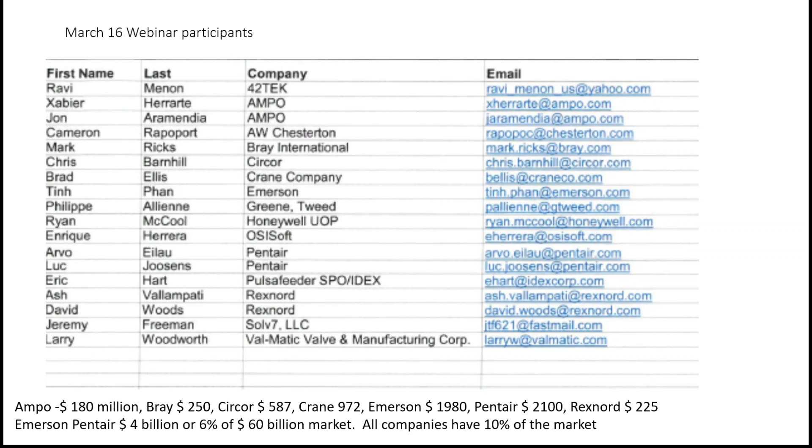So let's start with the markets. We believe IIoT will radically change the valve routes to market and the revenues, with a growth rate of about 13%. It will be responsible, and we'll get into the definition in a minute, for valve revenues of about 50 billion by 2030. So if you're an active player in IIoT, you're going to have potential for $50 billion more in revenue, and some slice of that pie, than if you weren't involved in it as a valve supplier.

Certainly general purpose valves are the foot soldiers of IIoT, but the high performance valves belong in the armored division, because their performance is much more critical to the outcome of the battle to improve plant performance.

IIoT promises to revolutionize the industry, but only if it is accompanied by IIoW, the Industrial Internet of Wisdom. And we believe essentially you're at square one on the Industrial Internet of Wisdom.

Let me give you an example. With all these things we're doing in IIoT, you're going to have smart sensors that feed an edge computer that makes some sense out of it and sends the more important data to the cloud, where you have data analytics, and within seconds you've got some important data.

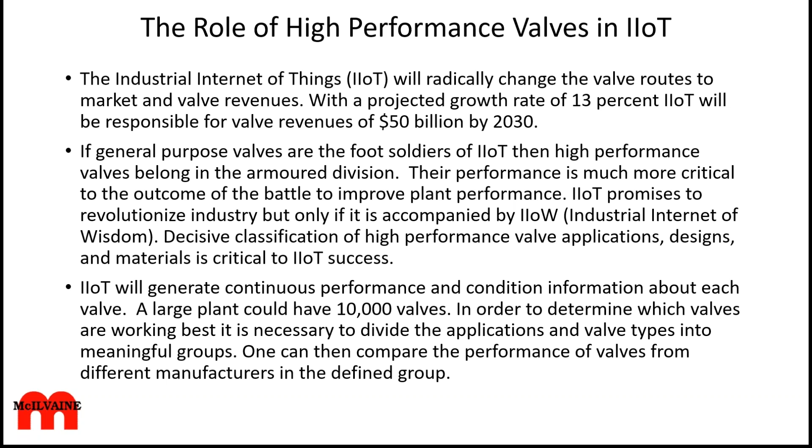IIoT will generate continuous performance and condition information about each valve, so that a large plant, which obviously has lots of valves, gets all this information, but then you really have to compare. Ultimately, if you're going to replace a valve, buy a valve from somebody else, or repair a valve, you really need to understand a lot more than what's just going to be fed digitally there.

High performance valves we've classified into severe service, critical service, and unique service. Unique service refers to engineered valves. For many of you, your ability to compete on the international market is in these three types of valve.

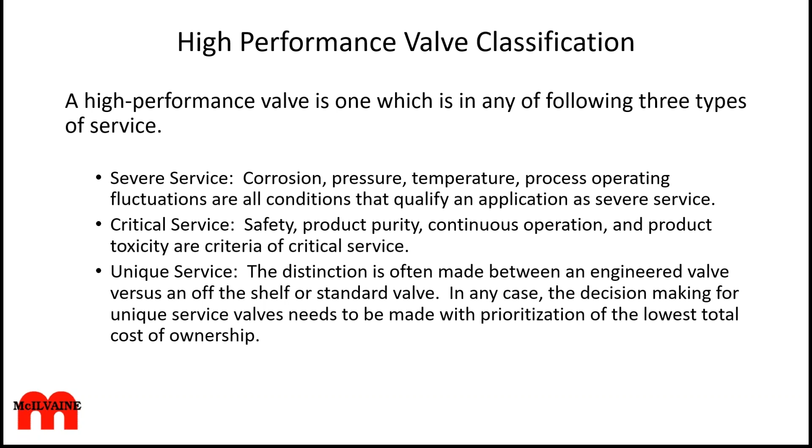When you get to general service valves, there is more competition locally around the world.

By 2030, we believe the total market for industrial valves will be 90 billion, of which 40 billion will be general performance, but 50 billion will be high performance as we've defined it.

The conventional route to market will account for about 40 billion in sales, but a new route to market through remote O&M, and individual operators having plant-wide, system-wide activities to operate valves across all these different plants, means it's a whole new route to market. You're not selling to the individual plant—you may be selling to a third party or to corporate management. Companies like ArcelorMittal have gone to global sourcing for all 200 of their steel mills.

The other opportunity is additional revenue. With smart valves and software you'll be able to add, you're going to generate another 20 billion in sales. So one way or another, your 50 billion in revenues will be attributable to IIoT and remote O&M, and of that, about 28 billion will be from high performance valves.

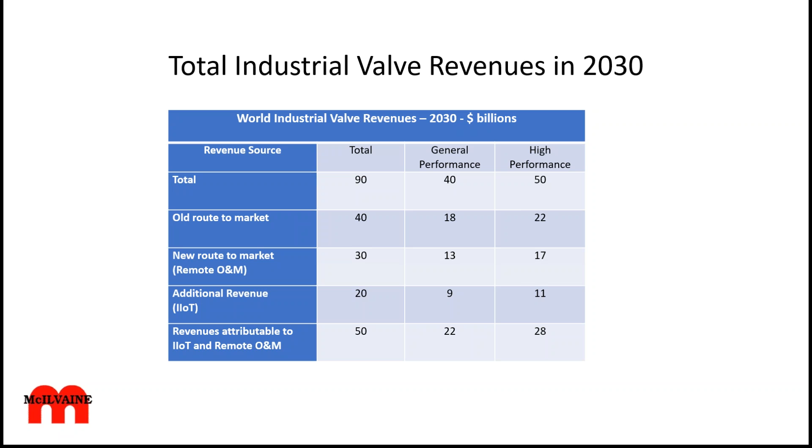Any questions there before we move on?

Performance valves, but his willingness to assume a greater role—this is, I think, one of the challenges for you if you're valve manufacturers: how do you move forward on this? How much of it do you do yourself?

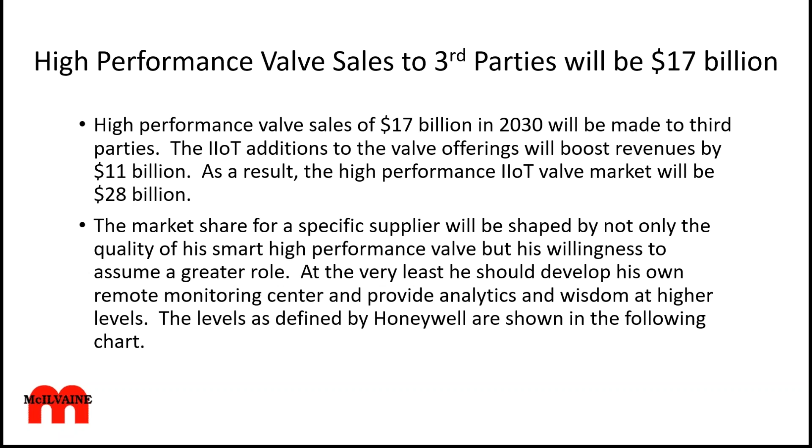Other things that you need, and then on the other hand, who are you selling to, and how do you sell to all those people? So those are all the things that need to be organized here.

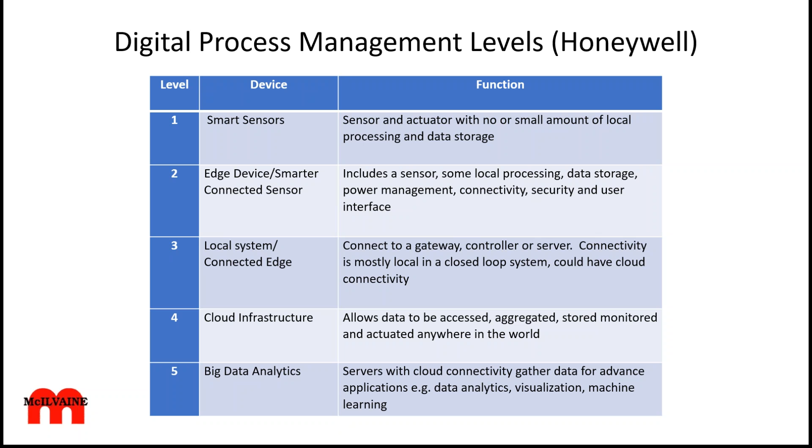Honeywell calls them stacks, but basically you have a sequence here, intelligence-wise, from the smart sensors to your edge devices to the local systems, and then the cloud infrastructure, and then what IIoT likes to call the big data analytics. But again, we're at square one with IIoT—it's one thing to analyze all this data digitally with digital analytical tools, but making use of it and understanding it in a broader sense is where we're just at square one.

If you're a valve supplier, at the very least, going back to those three levels, you have the opportunity to generate revenues in those first three levels. But some of you are already involved in processes, so some of your companies are already at an opportunity for levels 1 through 4. And people like GE are also supplying the systems—they not only have the valve but the system, so they're involved in the 1 to 5 level. But for valve manufacturers that are smaller and only involved in levels 1 to 3, you've got to figure out how to market and collaborate with all these people up through levels 1 through 5.

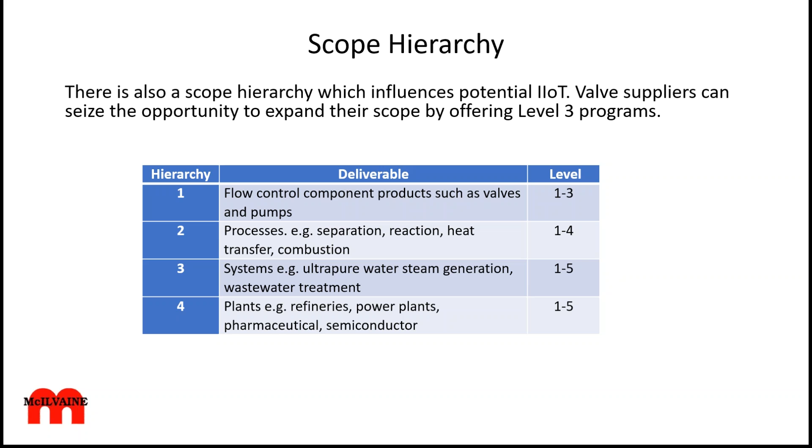There are lots and lots of things going on. For instance, Uniper and India Power are setting up systems to support and operate Indian power plants—one of the largest suppliers in Europe and a major player in India in that kind of role. And you've got Luminant, which now has a remote monitoring center for all its power plants, but also for all the industrial plants that care to join it, for Texas and some other areas. Duke Power is big on this now. So there's a number of individual companies moving forward on all this.

So the question is, who is going to capture the big market share on all this? Obviously the Metsos, Flowserves, and Emersons now with Pentair, and so forth, GE and Wärtsilä, all have opportunities. But a number of the other valve companies are already teaming up with the Honeywells, Rockwells, ABB, Schneider, Yokogawa, and many other providers. So there's all sorts of ways to play in this game, even with some of the major end users.

In fact, we've tried to create a network of plants within an end user for Berkshire Hathaway Energy. So the improvement of valve products is a very important aspect of all this.

As we said, one way to look at the IIoT is generating millions of continuously updated white papers. IIoT companies like to talk about subject matter experts, and a number of the valve companies have already pointed out, like Flowserve, that their valve expertise and subject matter experts are what can make them unique. We believe that, and we could pursue that at some length, but maybe now is not the time. We believe we need to go much, much farther.

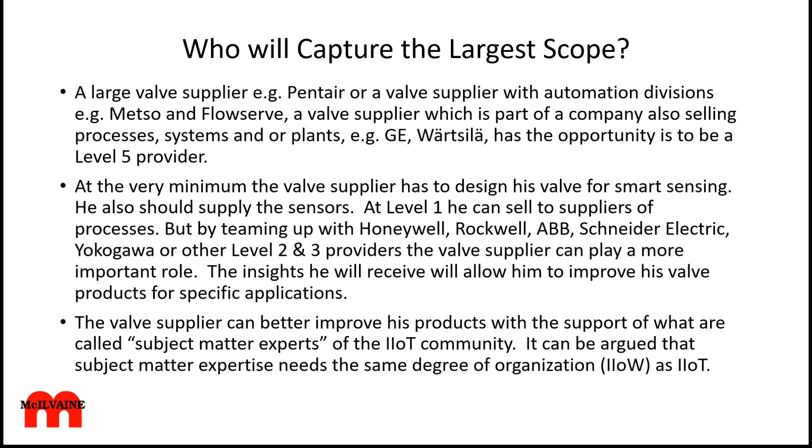And if the world is organized, if IIoT is organized the way it's going to be, those experts will be able to apply their knowledge throughout the world, and therefore focus on a very narrow area and derive sufficient remuneration to pay for their expertise.

So we set up a number of these beta sites for specific valve types and specific applications. We have a whole website devoted to it—one on molecular sieve switching valves, another on choke valves, and one on gate valves. We're just adding one on rising stem ball valves, which will be up in the next few days as well.

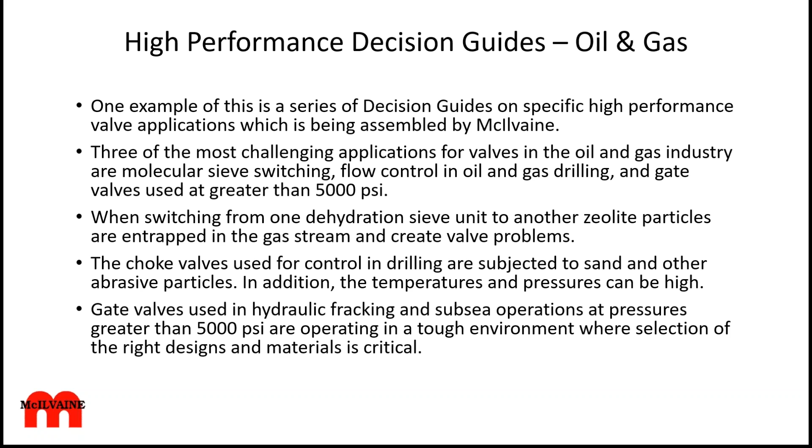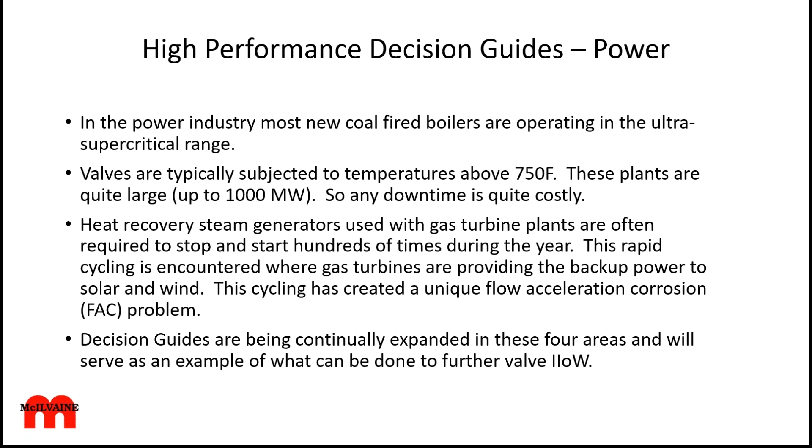On the same site we have a decision guide for ball valves in excess of 750 degrees Fahrenheit, primarily for ultra-supercritical coal-fired plants and other high pressure applications, mostly steam within the power industry. These systems need to account not only for normal plant operations, but also things like continuous cycling in combined cycle gas turbine plants, which has created all sorts of different problems, including flow accelerated corrosion. So these decision guides are going to be continually expanded.

Again, time for a question or two if anybody has one.

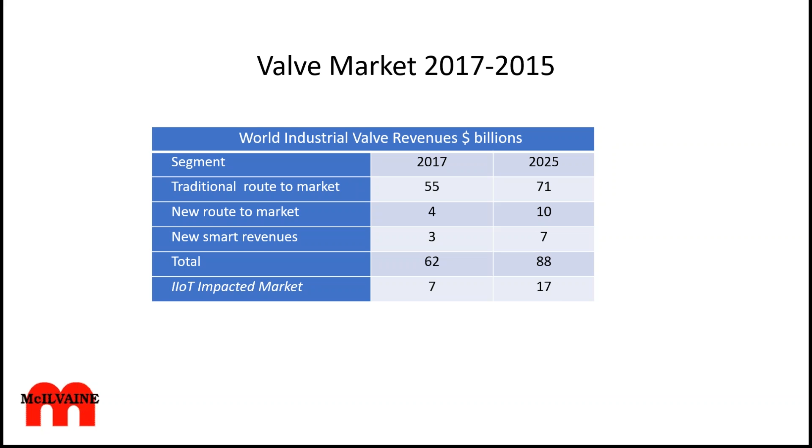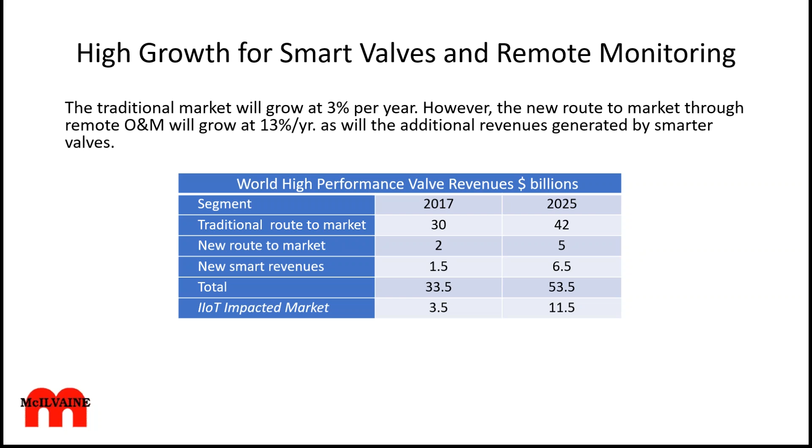So the traditional market is growing at 3%, while remote O&M and IoT is growing at 13%. The high performance valve revenue aspect of this will grow from $3.5 billion this year to $11.5 billion by 2025. Valve companies can increase both their CapEx revenues for smart valves and OpEx revenues for service and parts, and by acquiring all this process data to help design better valve products, they can even enhance their profits and revenues.

Again, we're talking about this giant resource of white papers, and it'll be proof of the lowest total cost of ownership if this data is processed properly. I think we'd all agree it's very difficult for end users to get good lowest total cost of ownership numbers, and this is going to be one of the advantages of all this.

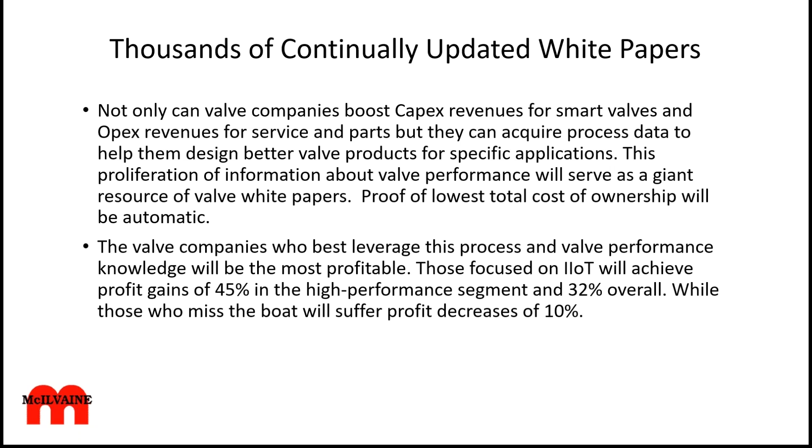Those companies that best leverage this data and take advantage of it to make better products are going to be the most profitable. Those focused on IoT will see profit gains of 45% in the high performance segment and 32% overall, while those that miss the boat are actually going to have profit decreases relative to the IIoT. A good portion of that will be increased base prices with better products.

So: increased market share, increased revenues just from smart products, and increased base prices because you've got better products and can justify that larger price. So a 45% profitability impact as opposed to minus 10% for those that are not involved.

So those are pretty big numbers, and it will be interesting to see how all that develops, but that is our take at this point in time.

Going into the actual activities that people are involved in, Emerson is already very involved in all this, and they've been lining up with software companies and even can have visual identification of a lot of these problems. But again, the claim would be with their Fisher Services experts and global valve experts and data from multiple sources that they're providing expertise that will help operate and maintain these plants around the world.

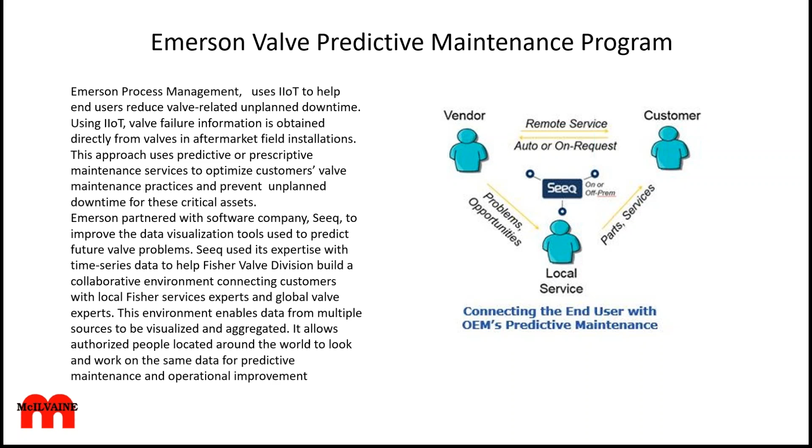Valve Keep is a GE program, and Allied Valve and several others, Chalmers and Kubeck and so forth, are extolling its use. And it was interesting, just a comment recently from Allied that as IIoT evolves over the next few years, we'll likely see smart technology be adopted for other types of valves and actuators, or certainly your on-off valves and so forth. Also commenting how much more efficient your operations would be if the valves were connected and constantly streaming real-time performance data. So all this data that is being input in the Valve Keep program can be coordinated with the online data that's also made available, and it's a whole new world with that combination.

And a lot of the advantages that you have with these valve management programs become greatly enhanced in troubleshooting and visibility and managing of parts and spares and so forth here.

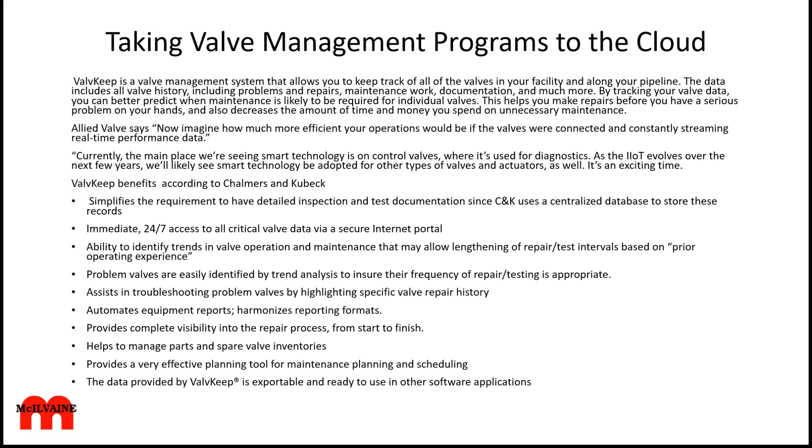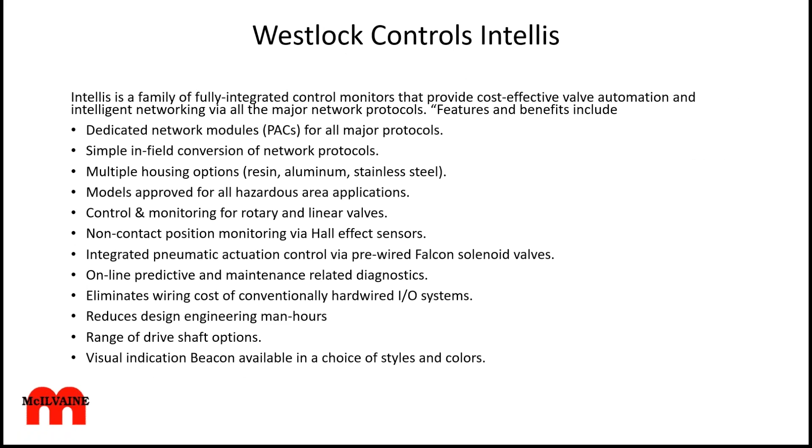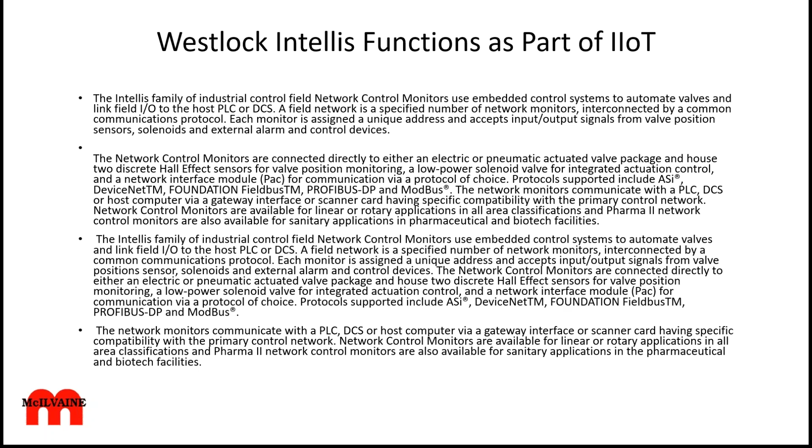Companies like Pentair, who will be part of Emerson, already are involved in control systems that provide effective valve automation. So this is the Intellis Westlock Pentair system that is being offered and uses embedded control systems to automate valves, and certainly has network capabilities, etc.

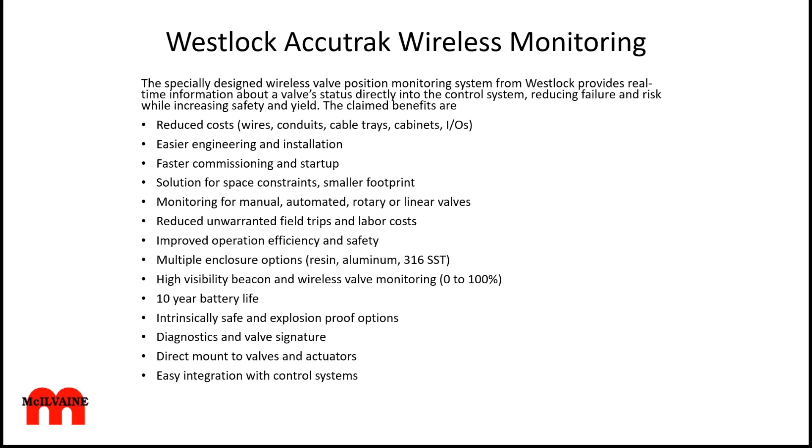And then they also have the wireless monitoring, which of course the wireless sensors and monitoring and so forth is a huge part of all this, to be able to communicate all this data remotely without wires.

The actuator people are another important source here. And we just looked on the AUMA site here, and they have a whole cloud program under construction. It will have a meeting point for experts, and optimum support is the goal for their program here.

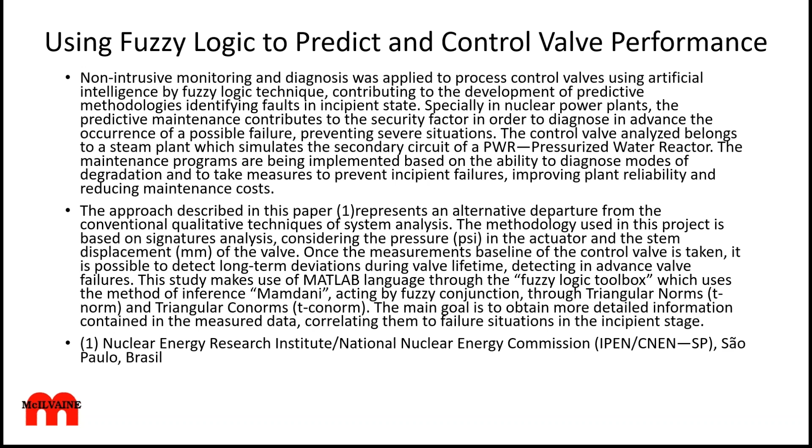We've been running webinars on optimization and neural networks and so forth for power boilers, but fuzzy logic technology is another opportunity for analyzing predictive maintenance needs. So one of the papers on this score has been published by a Nuclear Energy Research Institute here.

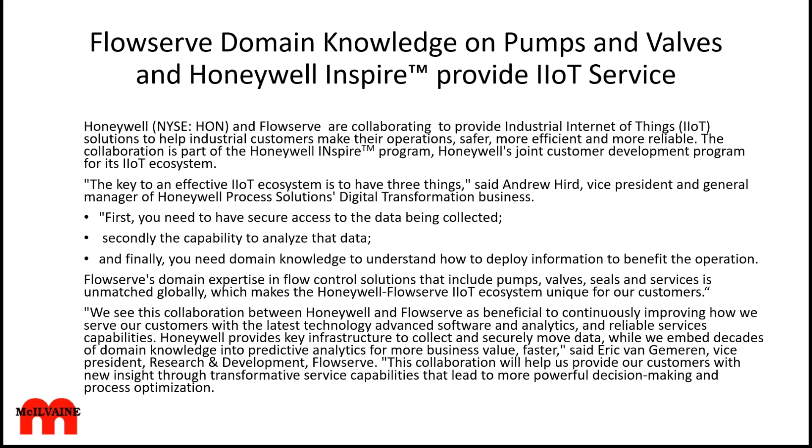And talking about companies combining, Honeywell and Flowserve are collaborating in this whole area. Flowserve is citing their domain expertise, and Honeywell has the digital process management systems that are needed here, and provides the infrastructure to collect and securely move the data. Of course, security is another big aspect of all this.

So the need is not only with your control valves, but certainly on your on-off valves, and that solenoid operated pneumatic cylinders and things are needed to be automated in the same way.

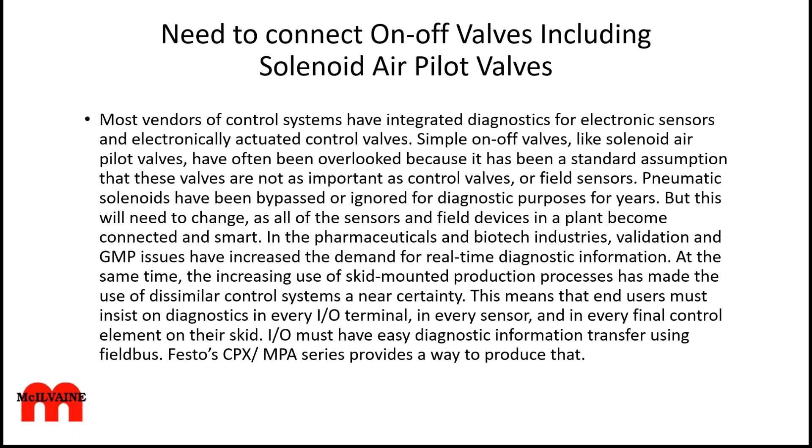Festo has pneumatic solenoid valve diagnostic capability, and points out that it needs to be integrated with the Emerson and Rockwell platforms, and they have technology to do so.

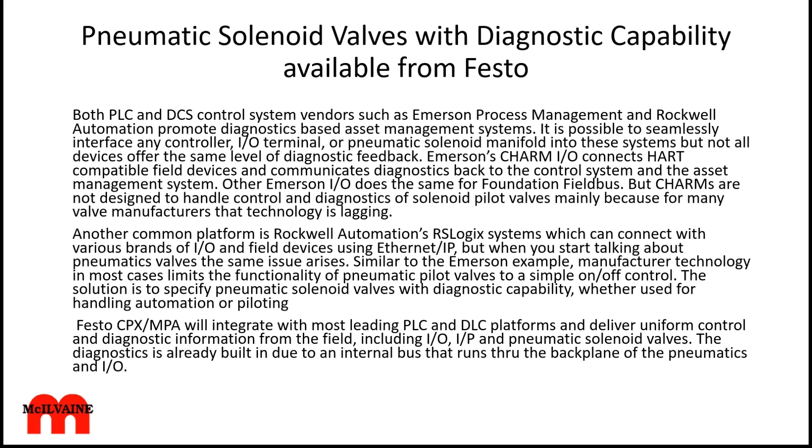So if this information can be extracted from the suppliers, that is certainly going to be extremely helpful. But that isn't really where it needs to stop. You need to have dedicated experts in all these niche areas. Some of them can be from the suppliers, or even supplier supported, but we do see the opportunity for people to become very, very niche oriented.

And right now you're losing about 10% of your industry expertise every year. It's only about 5 or 7% of your valve engineers, let's say, each year.

Those that retire obviously have more knowledge than those just entering the marketplace. In terms of the expertise moving out of the industry every year, it's a huge amount, let's say 10%. A lot of these people are interested in working an hour here and there. They wouldn't mind being part of a 24/7 program, even though they might only get an occasional call. Being semi-retired, they're in a position to enjoy something like that, and also to provide a level of expertise that is incomparable to what would otherwise be available. It gives them a chance to focus on an area, and the more they focus, the more expertise they can gain.

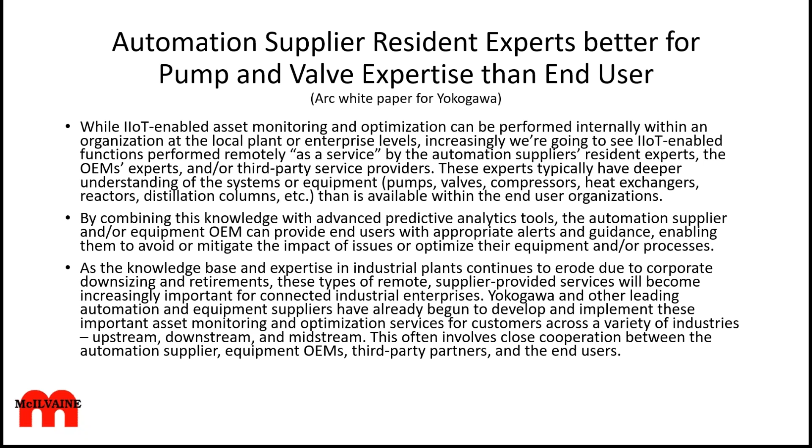What we see with consultants that retire is they're very knowledgeable in a particular area. They retire hoping to do consulting in that area, and very quickly someone comes along with a project that's slightly in another direction. Very shortly, they're not even working in the area of expertise, or at least maybe the general area, but not the specific area where they really stand out.

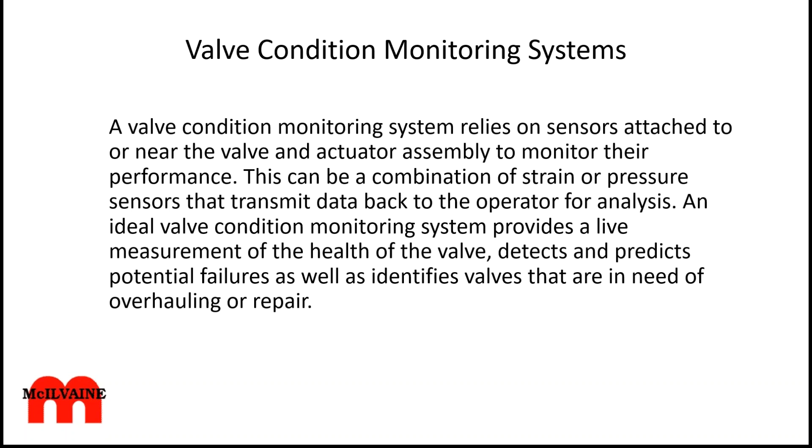Condition monitoring is a big part of the picture now, but it's going to be a minor part of the picture longer term. I think this is a stepping stone to add a lot of the other IIoT to the present condition monitoring activities, so it can predict potential failures and identify the valves that are in need of repair.

One interesting plant is on an island, operated by Shell. It's a gas plant, and it's one of the world's most advanced, basically operated with just a skeleton crew. Shell's goal is to operate and maintain the plant with as few people as possible. To accomplish this, online condition monitoring systems are employed to monitor virtually everything that moves in the plant, including pumps, compressors, control valves, certain structures, and critical shutdown isolation valves.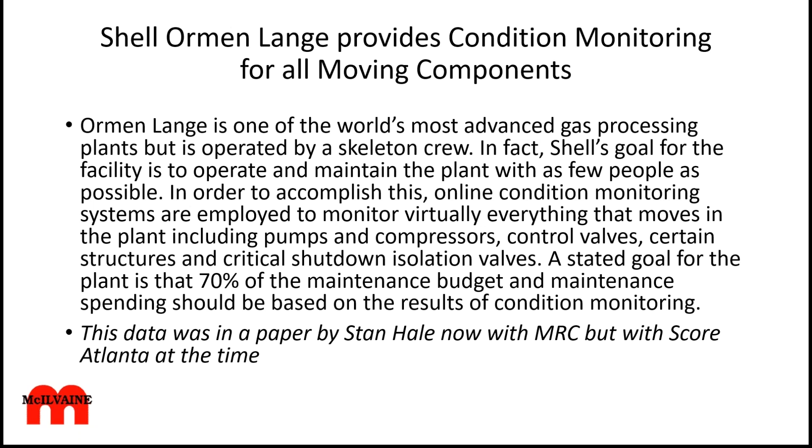A stated goal for the plant is that 70% of the maintenance budget and maintenance spending should be based on the results of condition monitoring. It's being used for 41 of the most critical shutdown isolation valves, a mix of single and double acting pneumatic and hydraulic gate, ball, and flow control valves.

These valves are instrumented with strain gauges, transducers, and acoustic leakage sensors. The data flows up the five levels we talk about here, and it's operating very successfully in Norway.

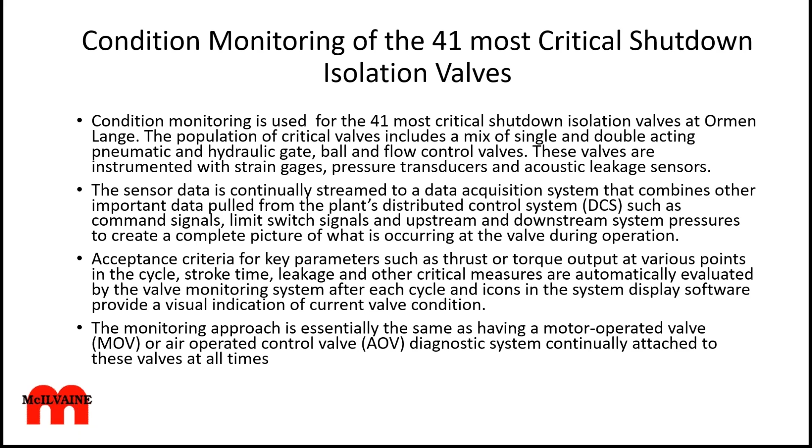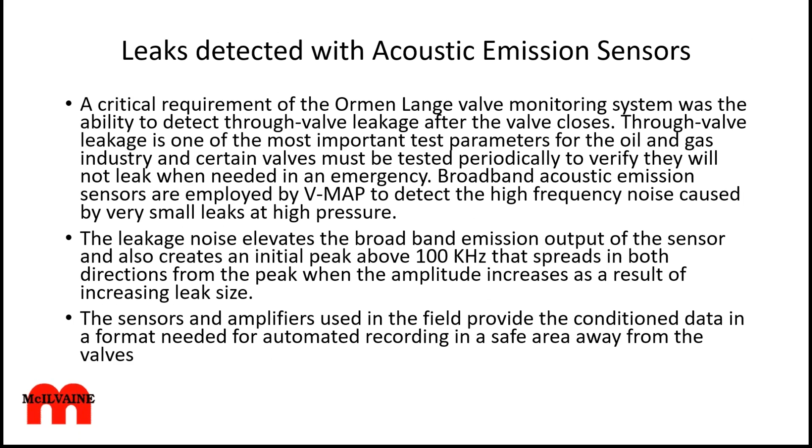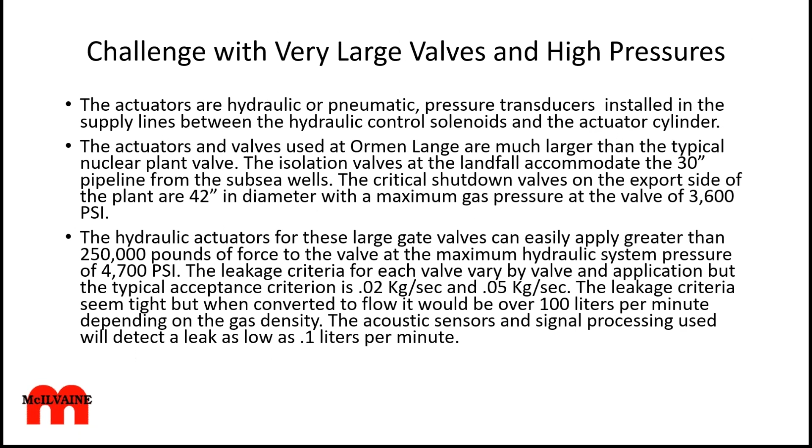One of the critical things is the detection of leakage with acoustical emission systems, which is incorporated in the plant as well. There's a challenge at the plant because of the very large size of some of the valves, up to 42 inches, as you can see here, and of course you're dealing with some pretty high pressures as well.

The data is used within and without the Shell network, so you not only have the ability to tap the intelligence of people focused on that particular plant, but throughout the whole Shell organization.

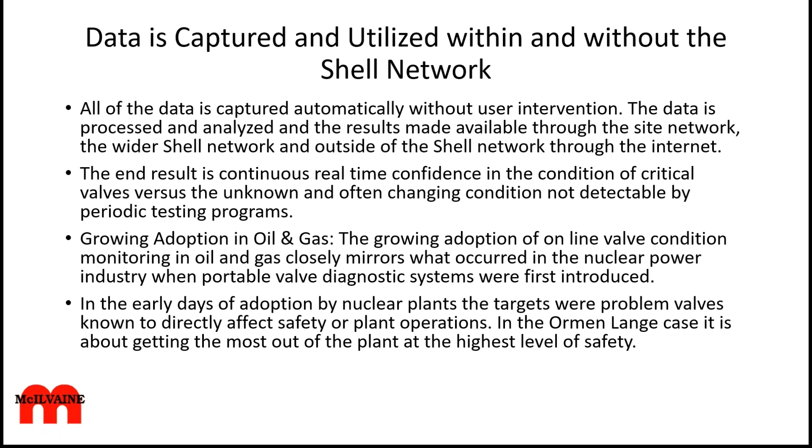There are a number of other companies involved in these systems. You have valve companies like MRC that have Valve Watch, and that's displayed here.

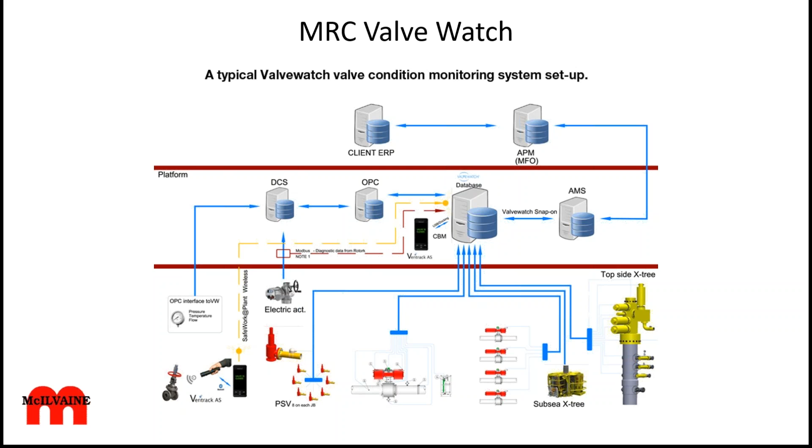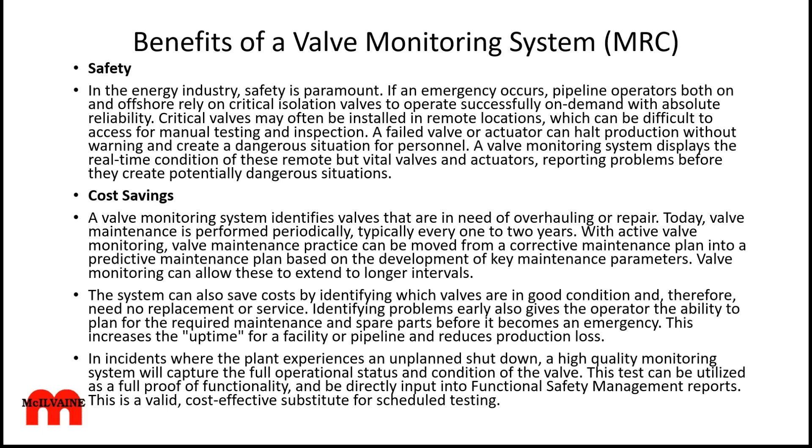Obviously, the benefits of the MRC system are in safety, cost savings by identifying the valves that are in good condition and therefore do not need replacement—a big saving—and then risk management. They distinguish between dangerous risks that are detected and dangerous risks that are undetected, and the proper system can identify and move these undetected faults into the detected area, which is a huge step forward.

That's the end of the part of the program focused just on the IIoT. Before we move on to some other things, and we do have about another 20 minutes left, I can answer any questions, and then we can move on to some examples of how we're addressing all this. Does anybody have any thoughts or questions at this point?

We do have a lot going on LinkedIn. I myself am connected to 3,000 people, and I find that particularly in the valve area, it's very, very helpful to do that.

This is the specific PowerPoint presentation that we're asking you to provide information on. This is a continuously updated decision guide, one of a number of them here.

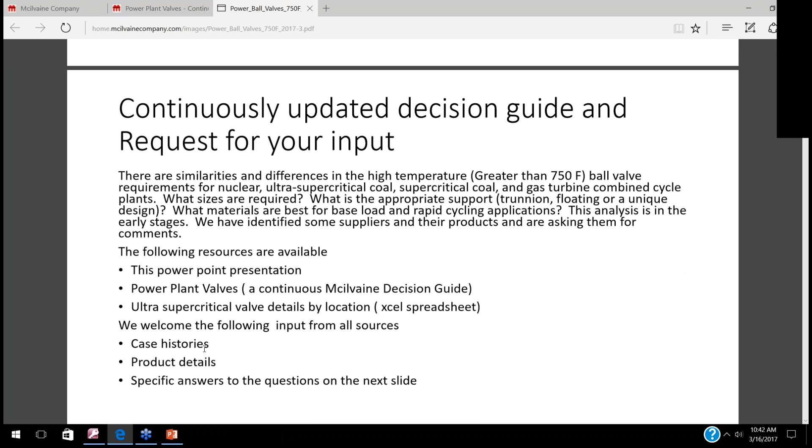We're looking for case histories, product details, and specific answers to these questions: what valve would you furnish for each of the critical points for each of these types of plants, and what valve sizes are required? Hard coatings and things like that are a major developing area right now, and what coatings are you using?

Back on the molecular sieve valves, it turns out that a special coated ball valve is providing, in one case, a better solution than the rising stem valves that had been used, primarily because of the hard coating they were able to apply.

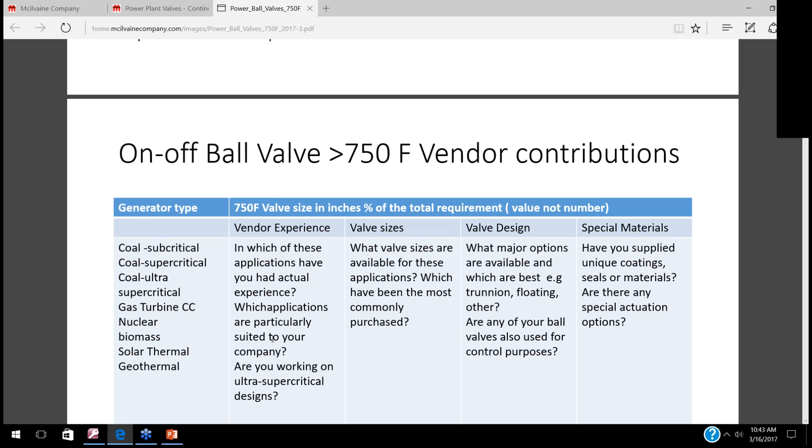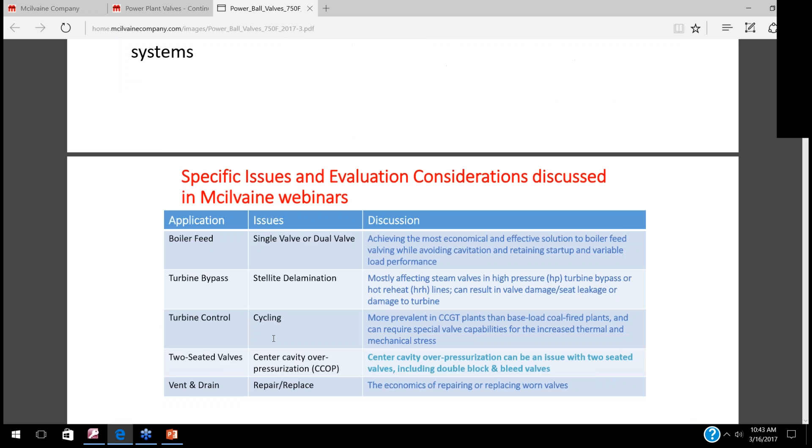So we do have these charts that we're asking people to look at, trying to determine what some of these problems are, and then getting into the details.

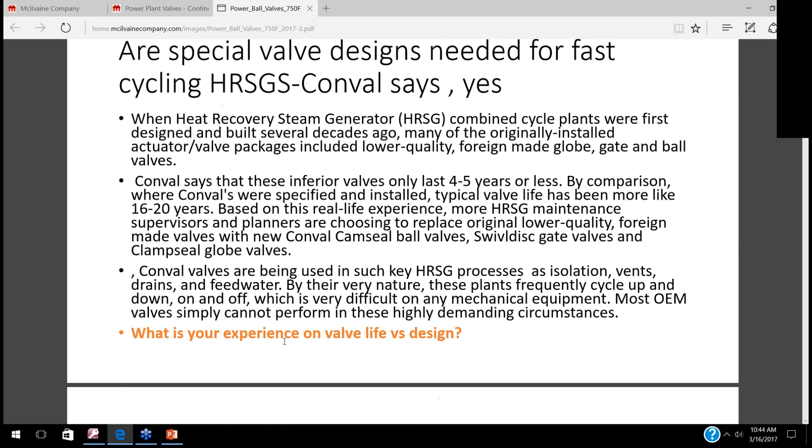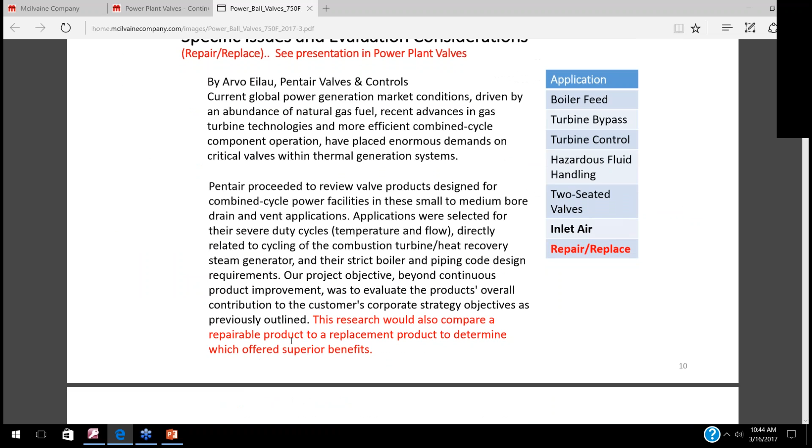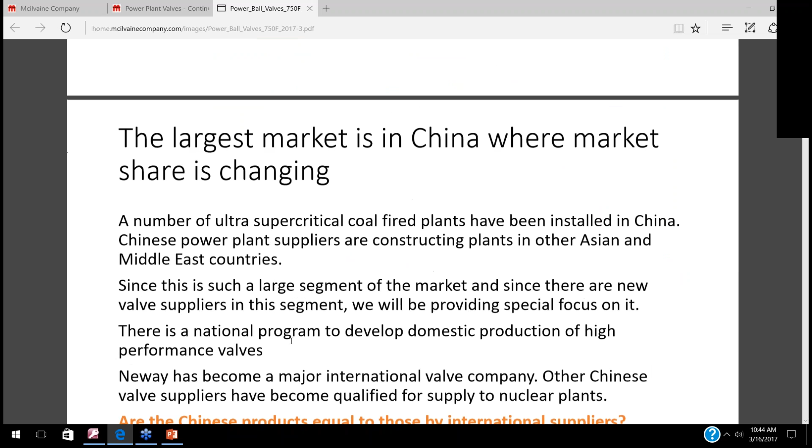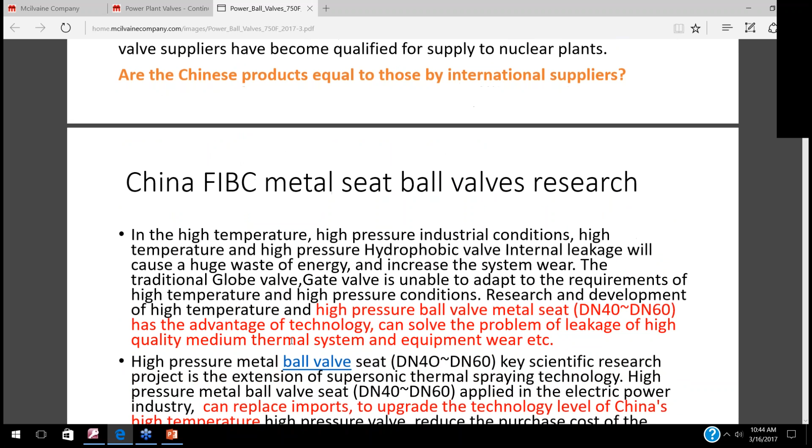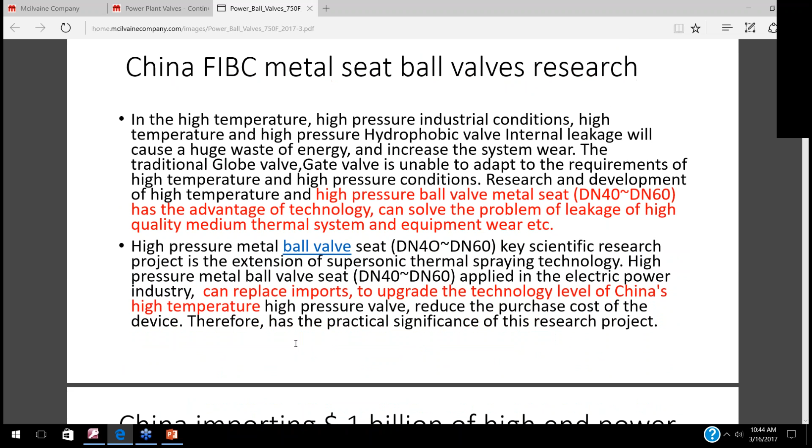Right now there's a bunch of Chinese questions because a large portion of these ultra supercritical steam valves are going into Chinese power plants. The question is, how many of those can be supplied by the international community? China's got a big push on to develop approval for their own high pressure valves.

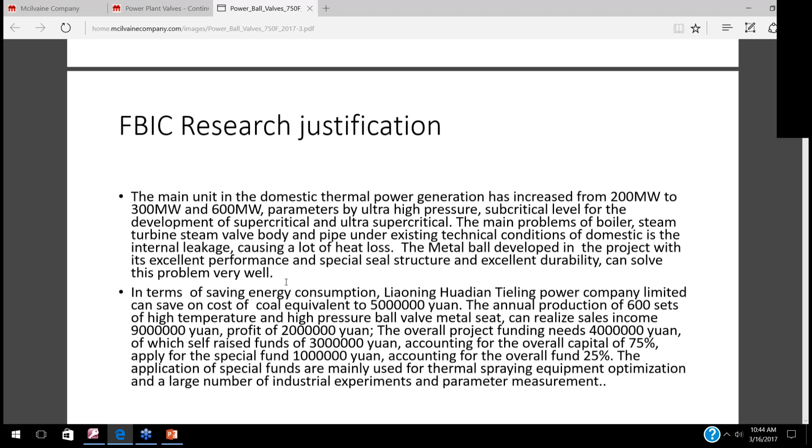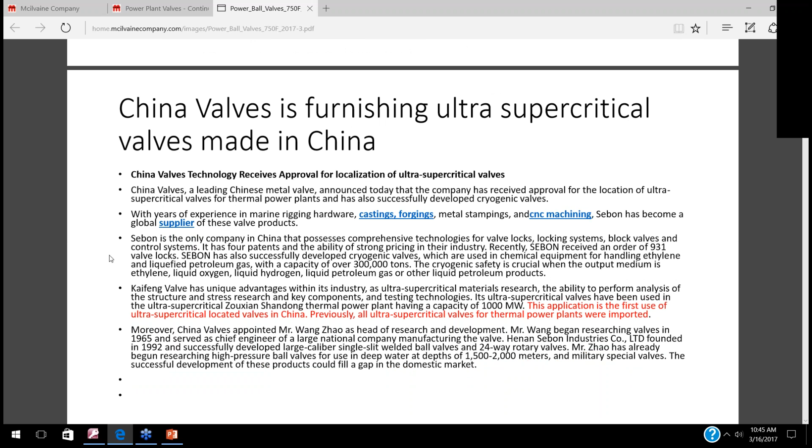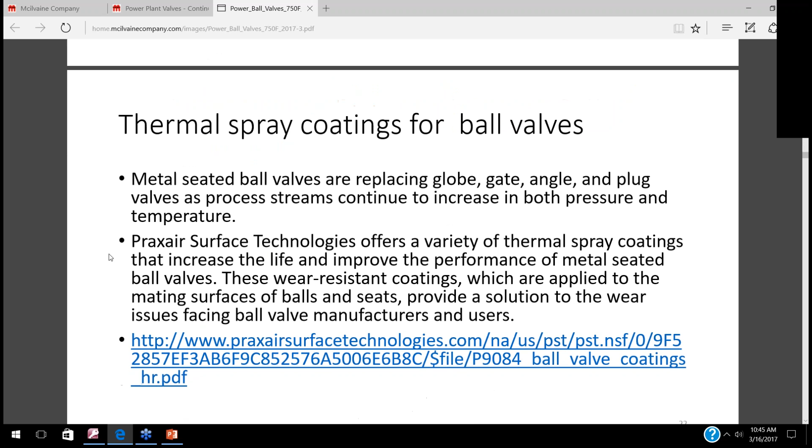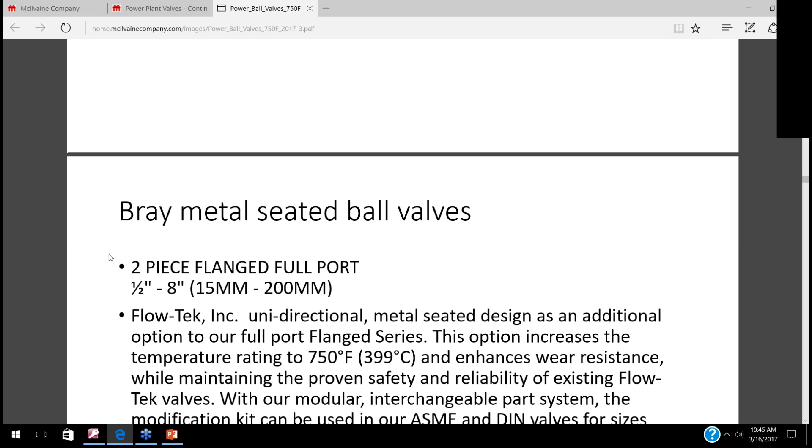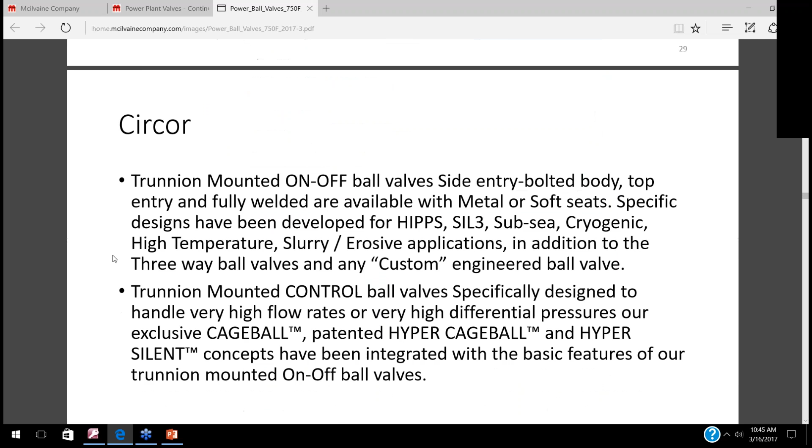So we're getting into the coatings, and we've done a number of deep dives on coatings, and we're asking for not only your case histories, but the valves that you're recommending for each of these applications. We've put up some of the information, but this is only the first few days that this has been up there.

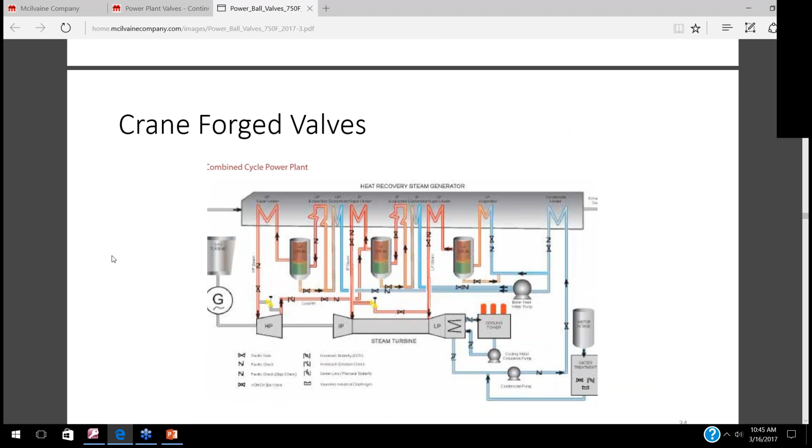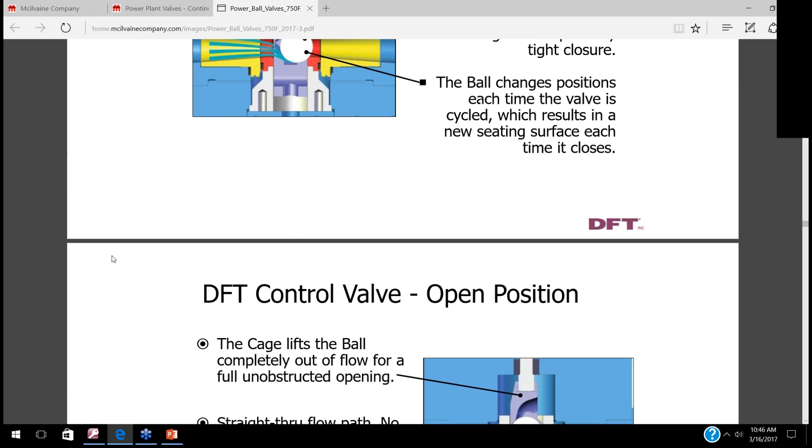We've got people from Crane on the phone now, and we really only have the one Crane presentation up there. The arguments for these specific types of valves need to be explored.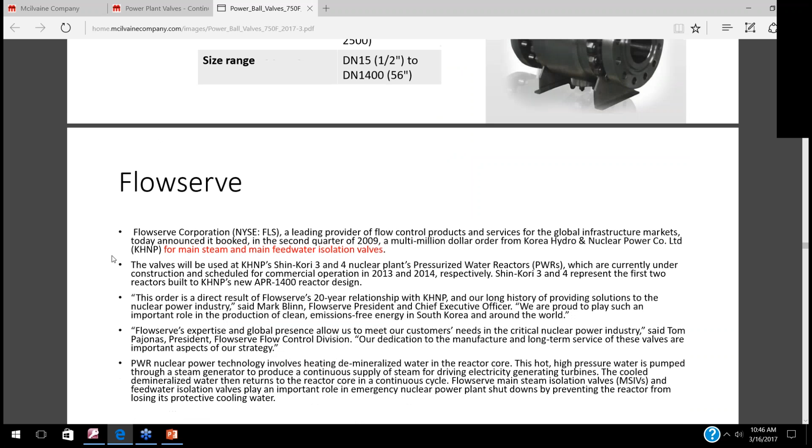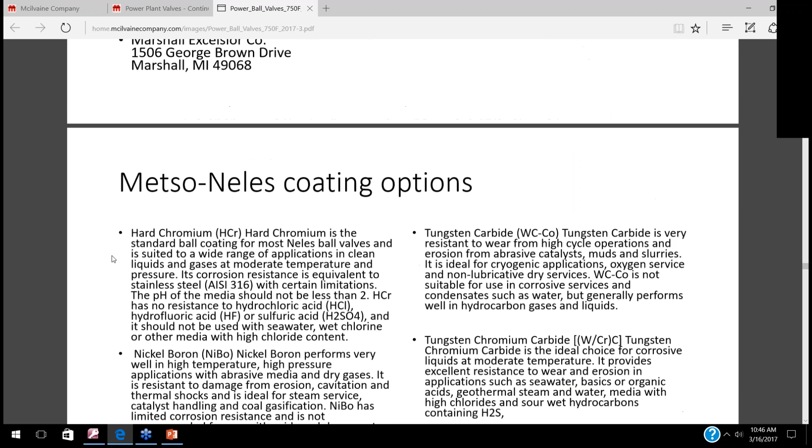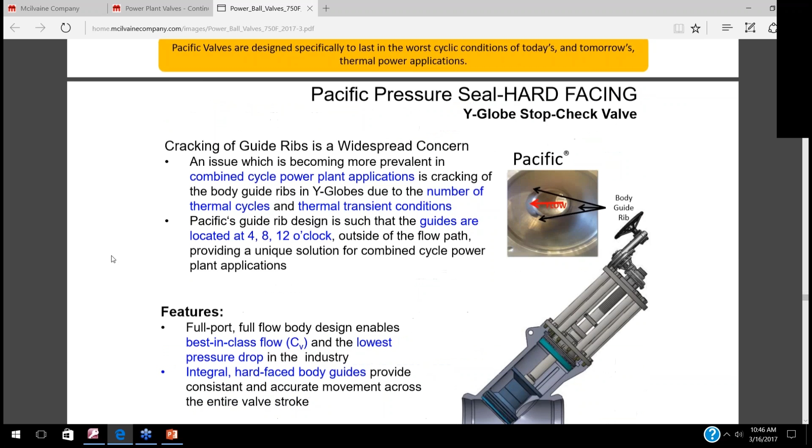So I'm just scrolling through all this. What are the advantages of coated valves? The valves offered by the various manufacturers are to be displayed there, along with what they think the advantages of their valve would be versus their competitors.

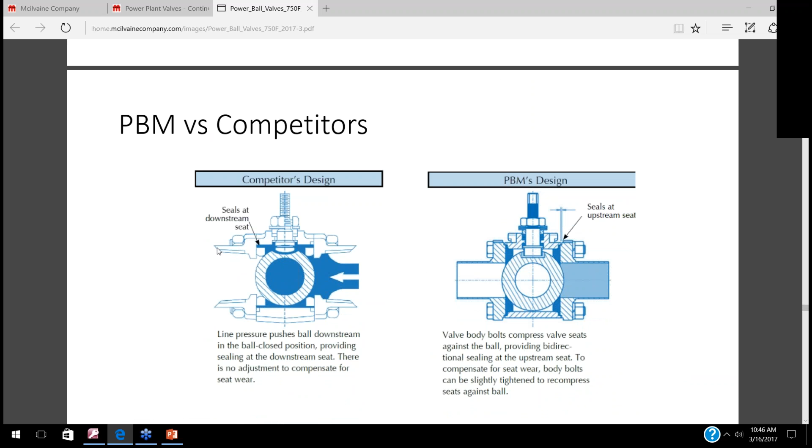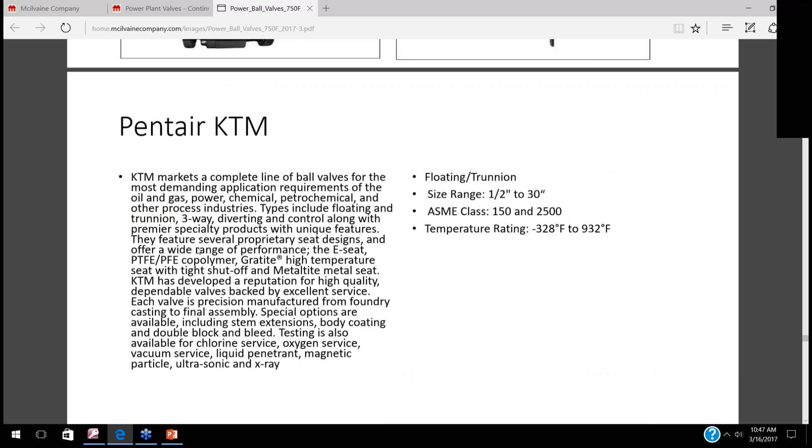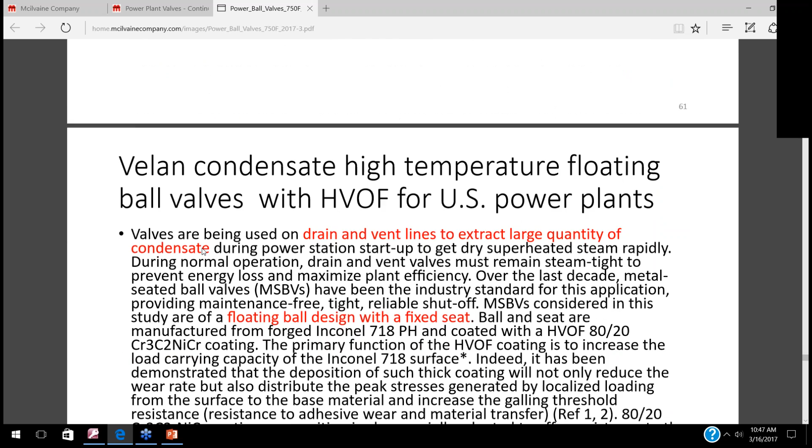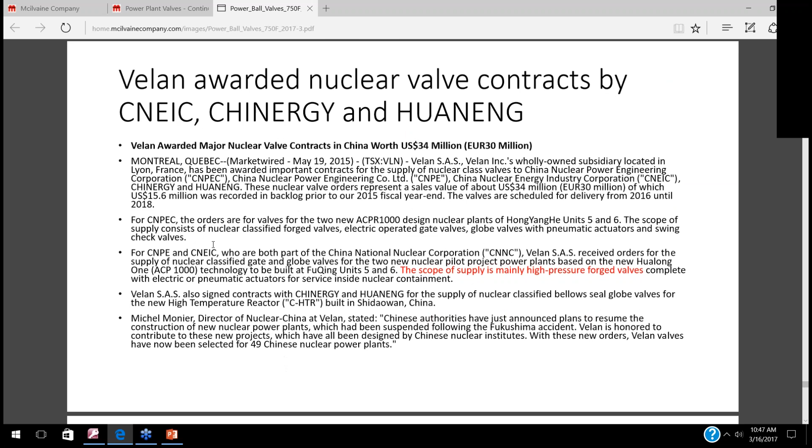All of this is up there for discussion, and we will welcome the participation of the consultants, end users, and suppliers on all these different things. The case histories to put up there is going to be quite important, and understanding who's being successful where is going to be quite important as well, along with the coatings you're using and why they represent an improvement.

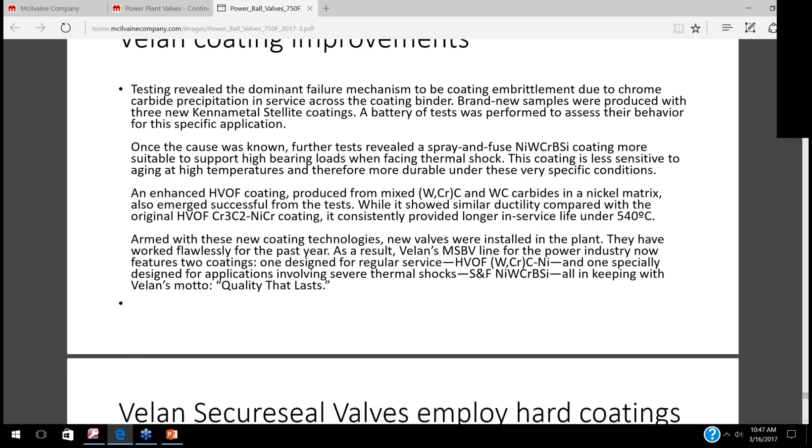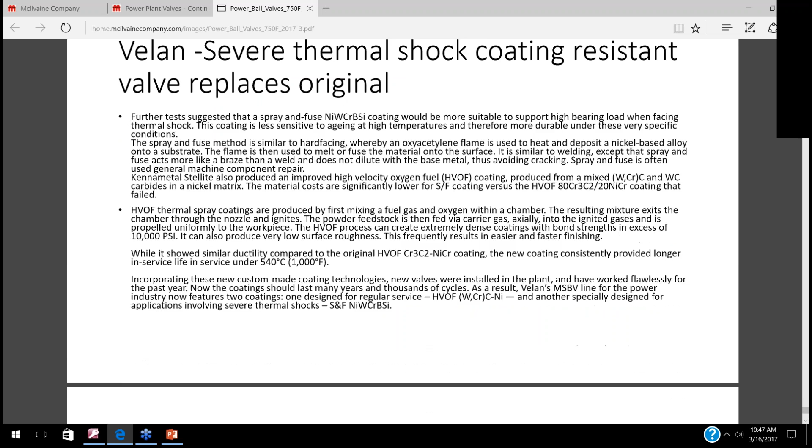There's a lot of work that needs to be done, but we do think we have a pretty good starting point on a lot of that in these areas.

So that completes my presentation for the morning here. Are there any final questions or thoughts people have?